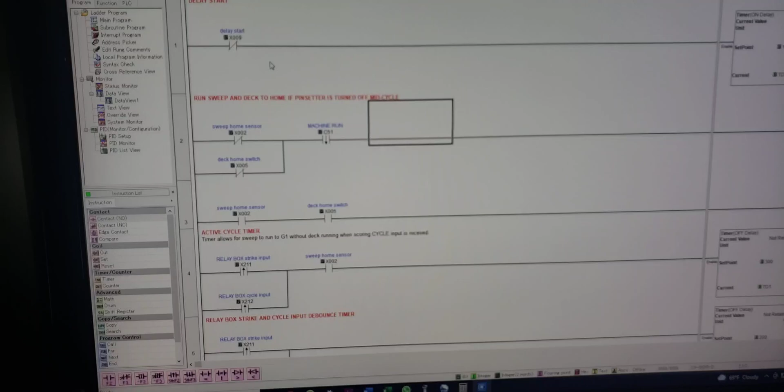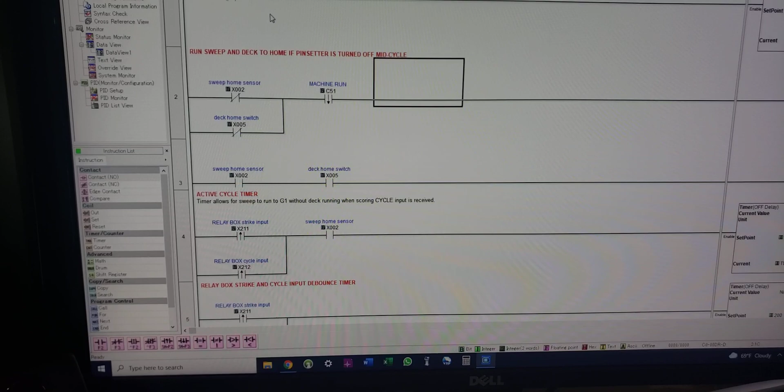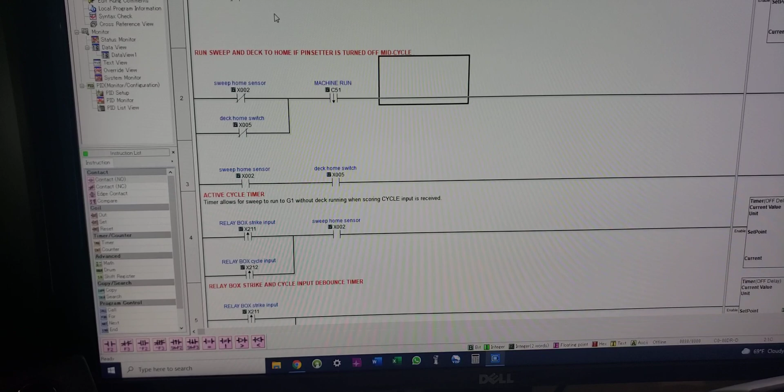I did have a request: can I see some of the code for the pin setter? I'm going to show this to you, and I want to make the younger followers aware of an option you probably don't even know exists. I talk to many high school and junior high students at shows, and a lot of them are into coding, but it's what I call text-based coding, like what you'd do with an Arduino or Raspberry Pi. They're not even aware that programmable logic controllers, PLC for short, exist.

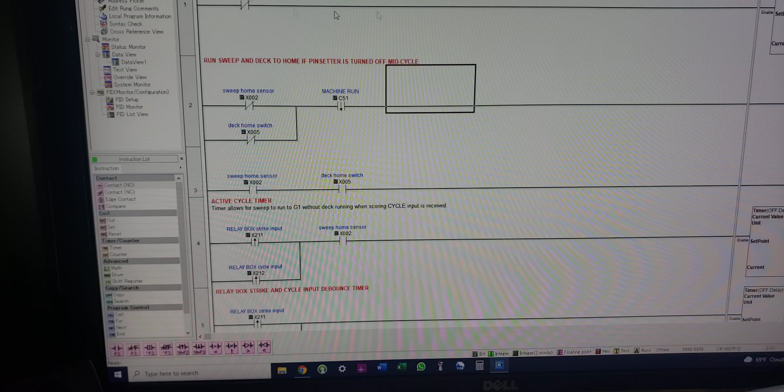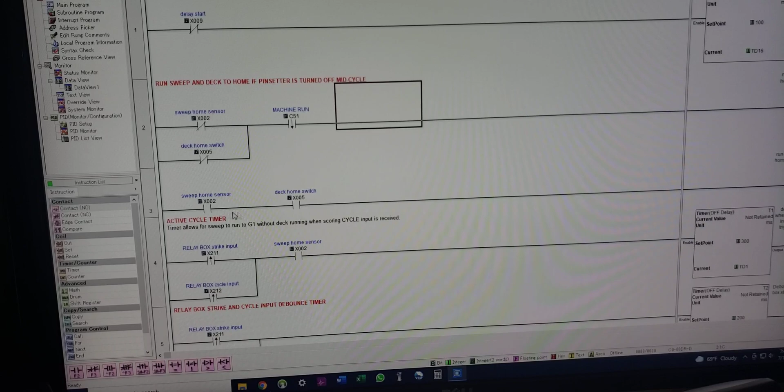This is an example of PLC code. What it is, there's what they call ladder logic. It actually looks like a ladder, as you can see, and you have inputs and outputs. This side of the screen is all the inputs, and over here we have a line designating all the outputs. Essentially what you do is build code on these rungs so that if a statement becomes true, it produces an output. That's a simplified explanation of it.

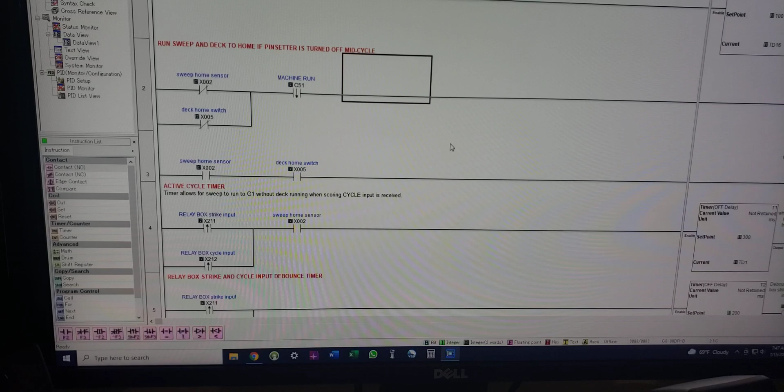This type of equipment is used in industrial automation. We use it because it's very quick and easy to change on the fly. The nice feature is that I can sit here and watch this program run. I don't have this hooked up to a PLC right now, but if I did, some of these inputs and outputs would show blue, indicating they were active. So if I'm having an issue or developing something new, I can go in and watch things live, which makes it very useful to troubleshoot.

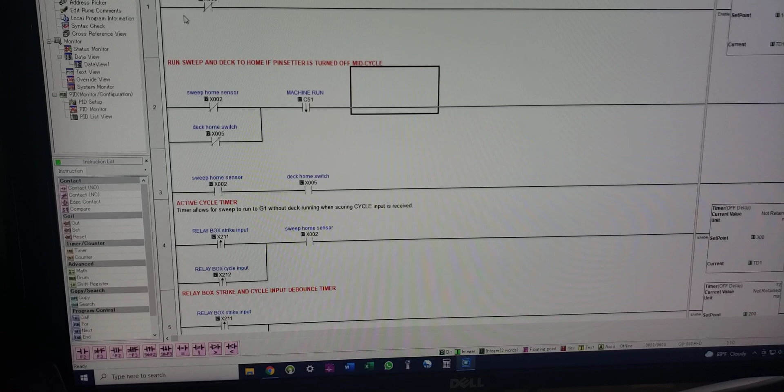As far as ladder logic, you do need to plan your programs because things read top to bottom, left to right. I'm not really familiar with text-based coding, so I'm not sure how that works, but you do need to plan things out. If you're looking at a career opportunity down the road, I know a lot of youth today like coding, so this might be something you want to look into.

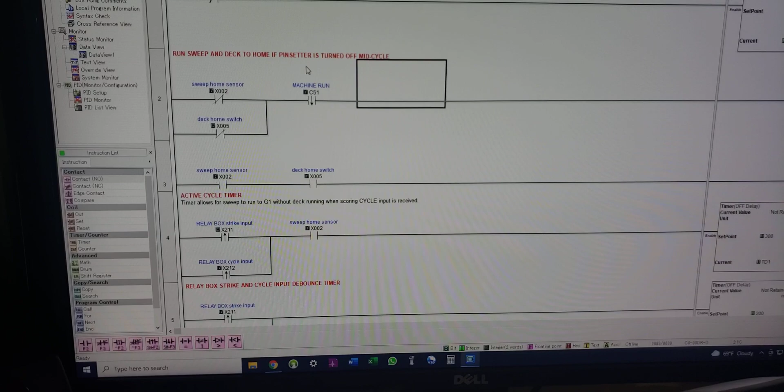Industrial automation, this is ladder logic, this is what we have available for the PLCs that we use. There are many different brands of PLCs, and within those brands, many different models. Some of the models are higher end, with much more functionality than what we have here, and they also have different programming methods.

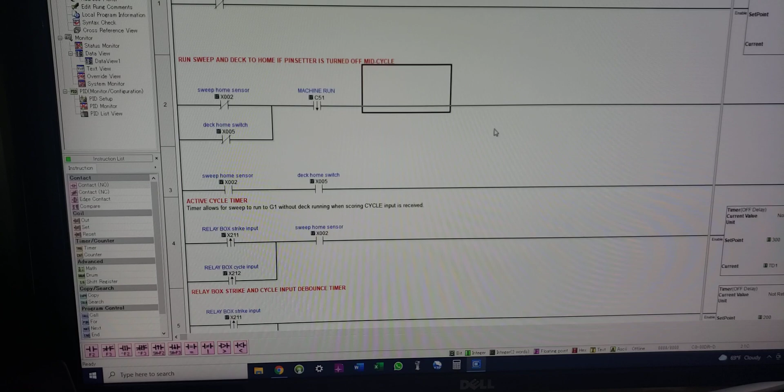So it's something to consider for your future. But this is what the program looks like, it's quite a long program. I'm going to scroll down for a little bit so you can kind of see. We've designated it into sections so it makes it easy to go in and troubleshoot.

So here I have power on, cycle delay timers, test cycle. It's kind of descriptive, these are just notes we put in there, and then you can see each input. This is called an address, this T16 what I'm doing right here. Then we can put a description in there. Over here is the output, and again it gets an address, and you can put a description in here. This is actually a timer, so I can go in and set the set point for the timer.

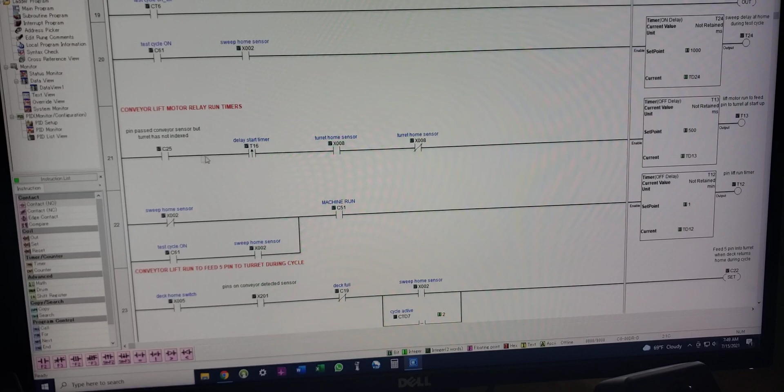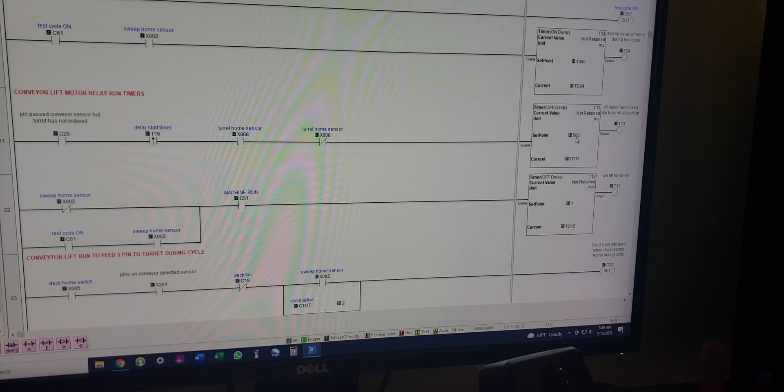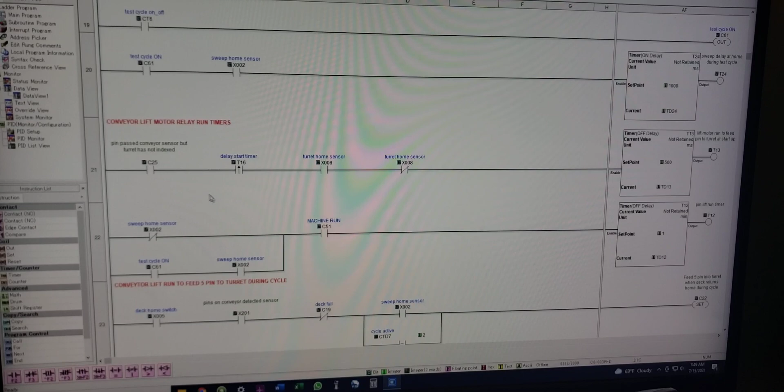This one is an off delay. So what happens is, for example, if this rung goes true, all these things are active, then this timer will run. As soon as it starts running, it's going to count 500 milliseconds, that's what this timer is, you can see I have the milliseconds here. Once it's done, it's going to shut off, but while it's on, this output is active. I'm using that output somewhere else in the program to perform a task, but I only need it performed for half a second. That's just an example of what goes on in the pinsetter brain.

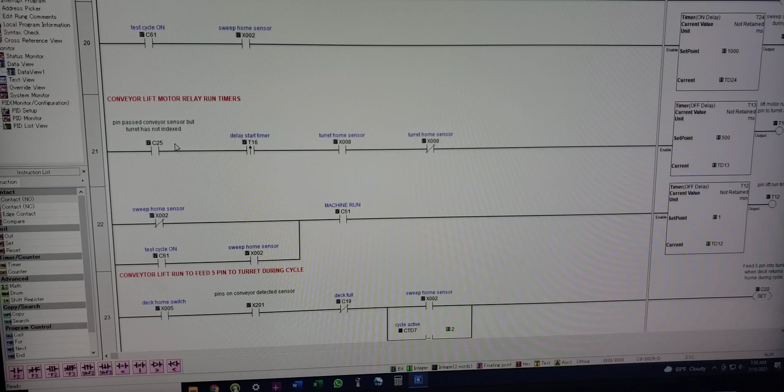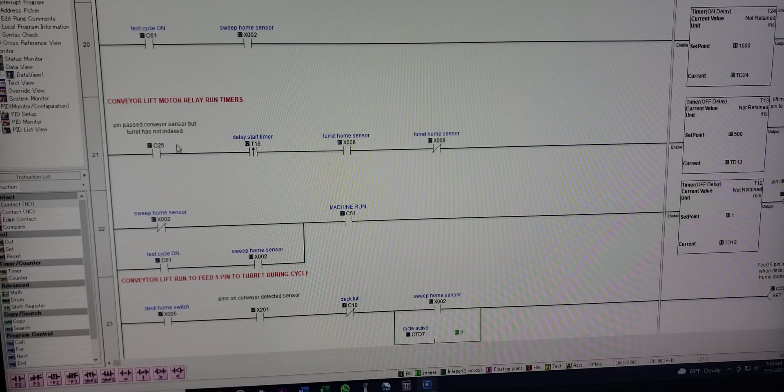Again, industrial automation and PLCs is something you want to maybe look at. There are plenty of low-cost options on the market. I can tell you the brand we use is a Click PLC, I think they start off around $60. We have one of the more higher-end ones for what we're doing, but there's even cheaper, lower-cost PLCs than that. It's all based on the number of inputs and outputs available, and what you need to do.